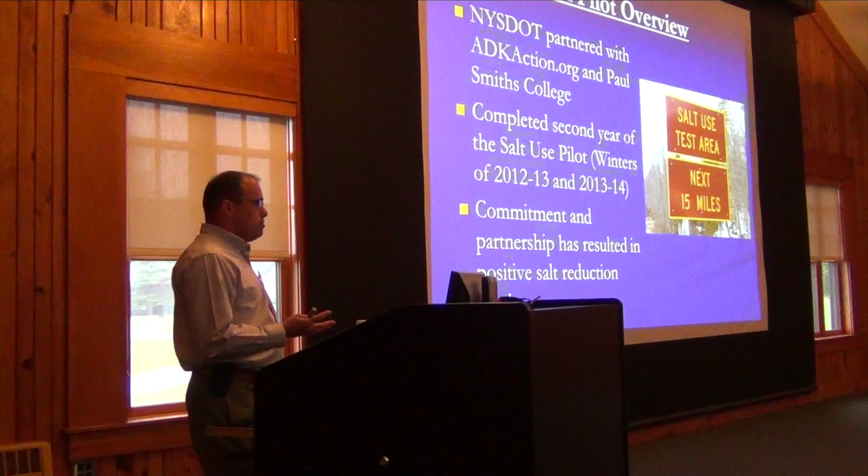The Department of Transportation partnered with ADKAction.org and Paul Smiths College to start this salt use pilot up here in the Adirondacks, to take a look at our practices and ways to help reduce the application of salt into the environment.

We just completed our second year - the winters of 2012-13 and 2013-14. This shows our commitment and partnership with the two groups, working with them and with our folks to try to have positive salt reduction results. This presentation will show some of those accomplishments over the past couple of winters.

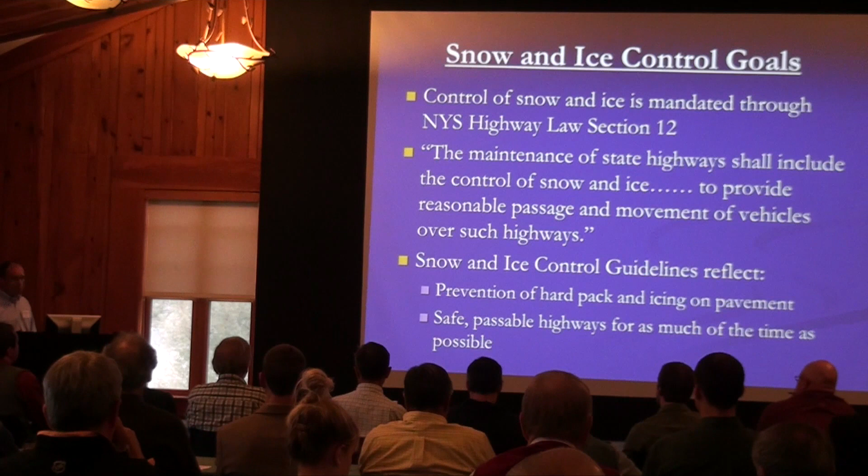Snow and ice control goals that the department has: we're mandated under New York State Highway law to provide maintenance of the state highways, including snow and ice control, and to provide reasonable passage and movement of vehicles over the highway system. Our snow and ice guidelines reflect that - we work to prevent the formation of hardpack and icing on pavement while also maintaining safe and passable highways for as much of the time as possible. There's going to be snow and ice accumulating on the highways, but as long as we're working to prevent that from bonding, we keep the highways relatively safe as best we can, while keeping the environment in mind.

In 2012, we modified our snow and ice guidelines, reducing our salt application rates. Statewide, for snow events, we reduced our initial application rates by 10% across the board. So that was one step we've taken.

We've also expanded the use of pre-storm anti-icing operations using liquids - expanding the use of salt brine in advance of a storm so that we can get the salt on the road, and then once the storm hits, we can come by with a follow-up application rate of salt instead of starting with our higher initial application rate. So that's another area where we've improved our operations.

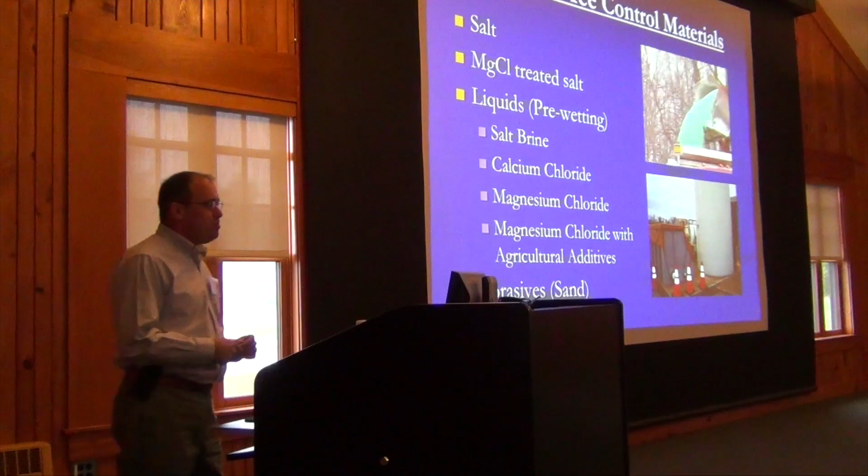Types of materials that we use: primarily we use salt. It's relatively inexpensive, although the prices did skyrocket this coming year with the OGS contract. We also use salt treated with magnesium chloride, which allows the salt to perform a lot better in colder temperatures, and we can use it at reduced application rates. Essex County, our DOT facility, has gone exclusively to treated salt now because of the added benefits we've seen in its performance.

For liquids, which we use for pre-wetting the salt before it hits the road, we use salt brine. Salt brine is also used for direct application on the pavements. For pre-wetting salt, calcium chloride is used, magnesium chloride is used, and magnesium chloride with agricultural additives is also utilized. That coats the salt, allowing it to work quicker and better at a lower application rate.

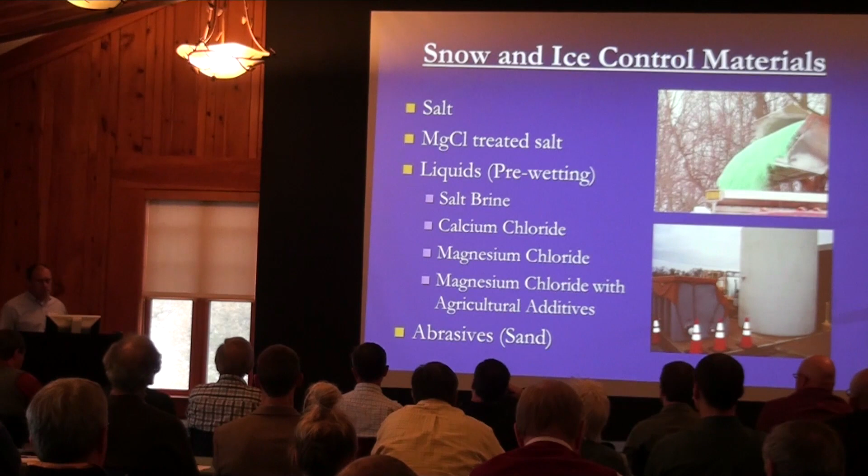Sand is not effective for higher traffic speeds. Heavier applications are needed, and the sand needs to be mixed with salt so that it doesn't freeze up rock hard in the storage facility. So we're still putting down higher application rates of sand with also a higher amount of salt within that sand. Unfortunately, sand does not melt ice, so it promotes hard pack conditions on the road, which require higher amounts of salt to burn that off.

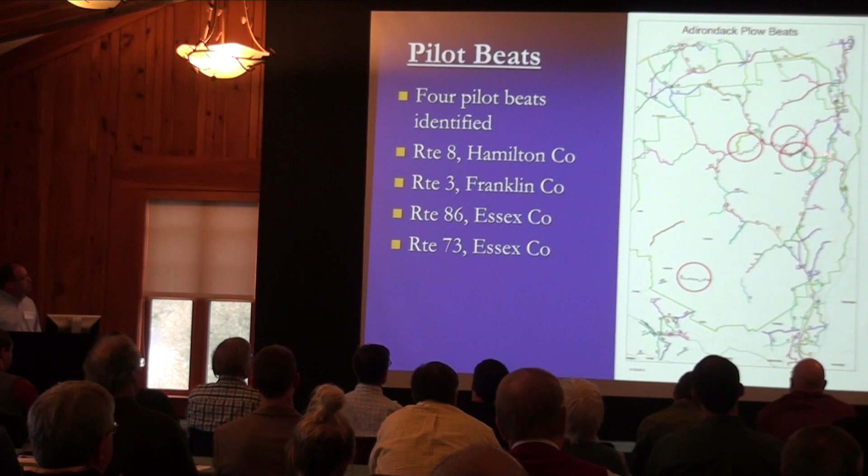This map shows all the plow beats all up in the Adirondack Park. All those different colors are individual snow plow beats. We identified 4 pilot beats for this study: one down Route 8 in Hamilton County, Route 3 in Franklin County, Route 86 coming out of Lake Placid, and Route 73 along the Cascade Lakes corridor.

So I mentioned earlier some of the challenges that we face in trying to maintain safe highways in the winter and also being good for the environment. But the demands and efforts of snow and ice control are different every winter.

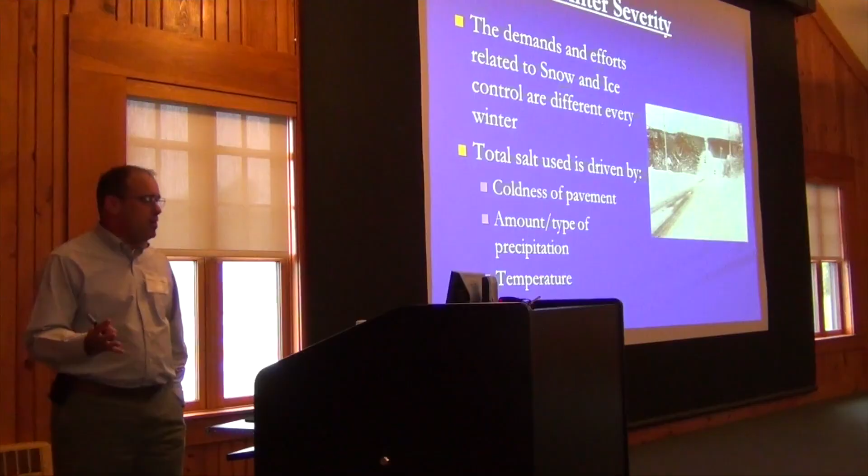You may remember the winter of 2011 - that was basically a half winter for us. There was hardly any snow, hardly any winter precipitation. Last winter we got clobbered - it was a very, very bad winter. We were out there quite often treating the highway pavements.

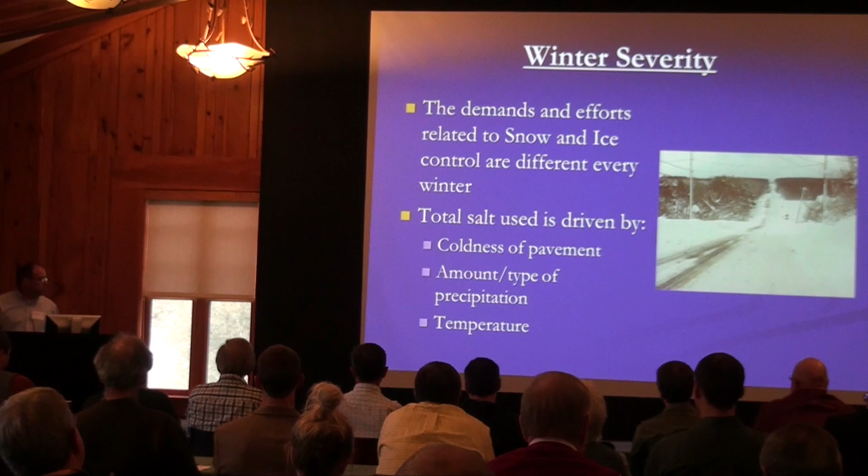So the total use of salt or any other snow and ice control materials are driven by the coldness of the pavement, the amount and type of precipitation - be it light fluffy snow, heavy wet snow, freezing rain, whatever the case may be - and the outdoor temperature.

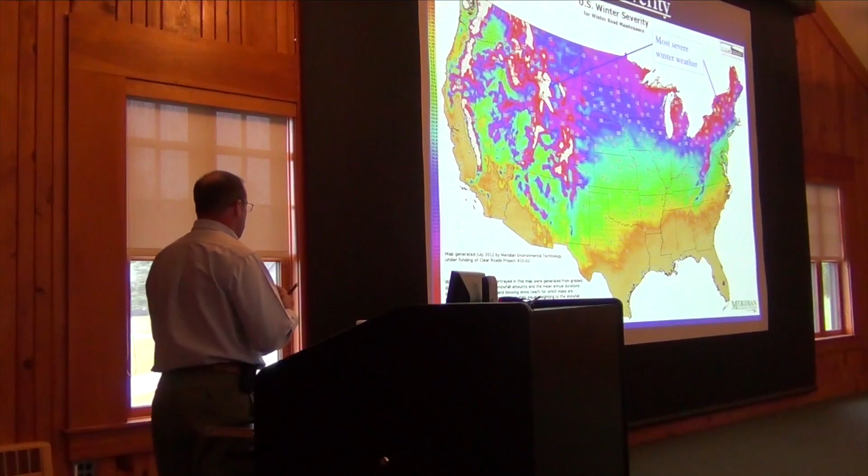The scale on the side here is like down south - you really don't get much. You can see we have no member states down here, so we can't go to warm places for these meetings. But down here at the bottom of the scale, where it's white and pink, those are the worst winter severity areas in the country. They take into account the amount of snow, the amount of freezing rain, temperature, blowing snow, all sorts of things. This is one map that compiles all that information.

So if you look at the most severe winter weather in the country, you can see out here in Colorado, you've got some white areas, up in the high peaks of the Rockies. Take a look right there - that's Saranac Lake. So Saranac Lake, Franklin County, up here in the Adirondacks, the reds and the whites and the pinks - New York State has some of the worst weather in terms of winter severity in the country.

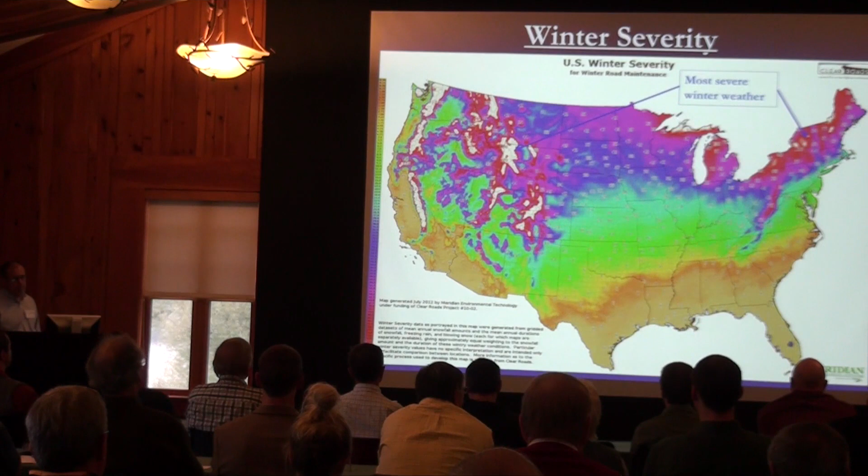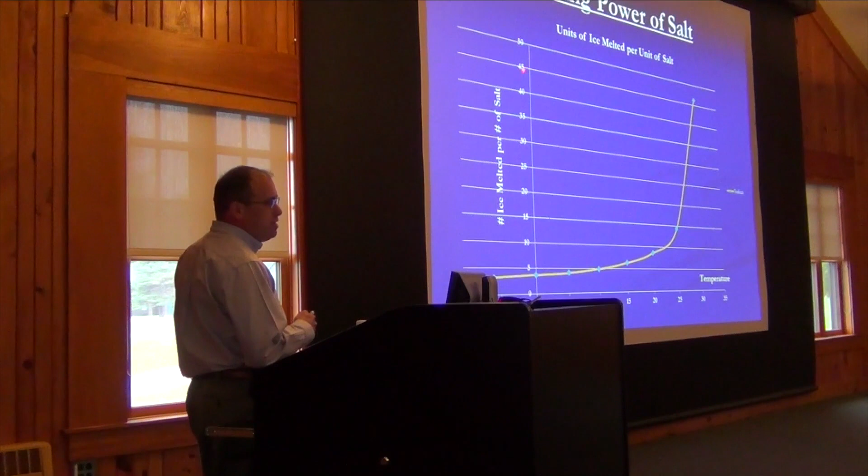Let's talk a little bit about the melting power of salt. Salt is not very effective in cold temperatures. If you look here at a temperature of roughly 30 degrees, this shows that 1 pound of salt will melt 45 pounds of ice. You drop 5 degrees down to 25 degrees, 1 pound of salt will only melt 12 pounds of ice. And it gets worse as it gets colder.

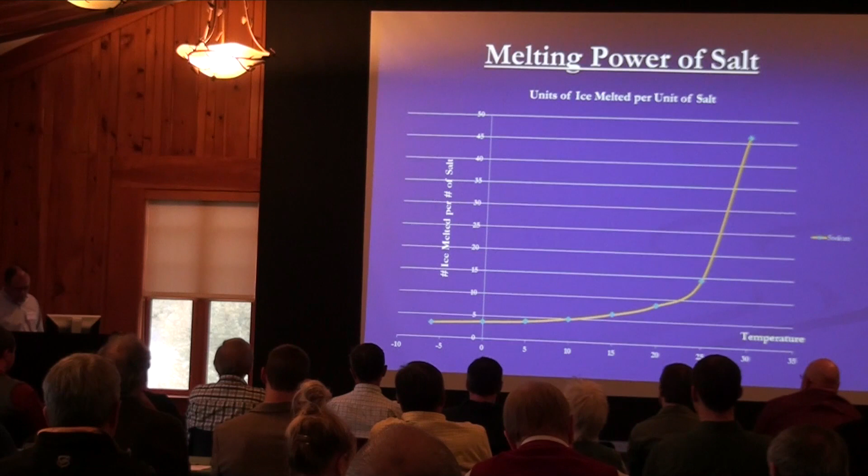So with the colder temperatures that we've been experiencing, although we're working hard to maintain lower application rates and control the salt use going out, with the lower temperatures and higher precipitation, more material is needed. So what we did is try to equalize a normal winter to what we experienced over the last several years.

We developed a relative severity equation here. From 2008 through the 2013-14 season, we developed an index factor which looked at the National Weather Service snowfall data, and we divided that by a temperature factor. The temperature factor is the amount of ice melted over the amount of salt needed to melt that ice at average winter temperatures.

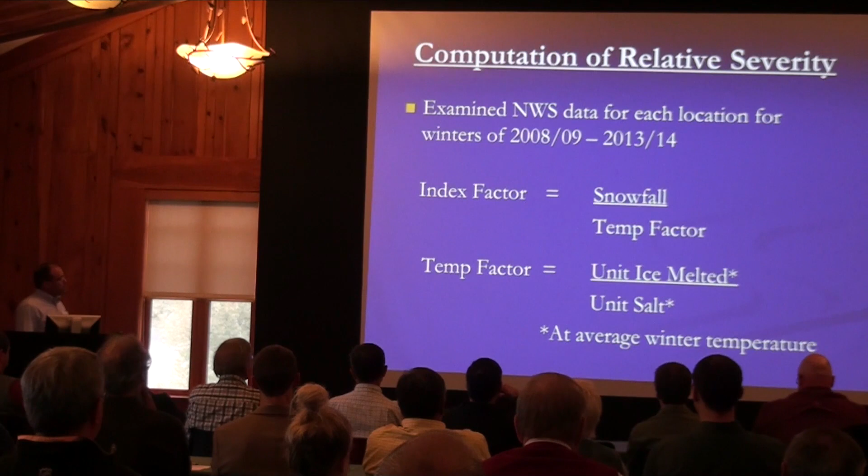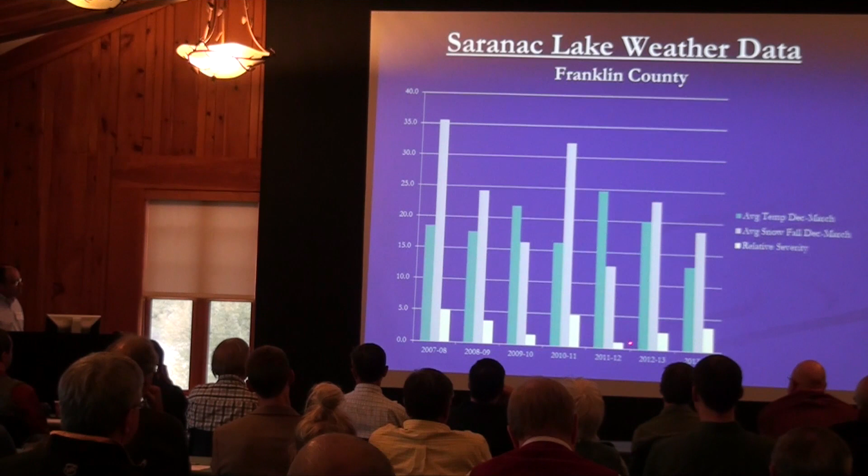So what we did is take that information. This is the Saranac Lake area, Franklin County. The average temperature is the blue, so here's 2011 to bring that up, but you can see the temperature was declining, getting colder. The average snowfall, you can see the amount here, and that is increasing, shown in a grayish, whitish color. The colors don't do too well on this screen, but basically using that equation with winter severity, you can see at least the last three seasons, when you equalize it out, the severity of the winters has been increasing, moving up.

So you can see over the last bunch of winters, the salt use has actually been coming down a bit. But these last couple winters, with that increased severity, the actual amount of salt that's gone out has increased a little bit over the last few years.

And this is for the entire shop in Franklin County, Paseco Lake, Lake Clear, right Rob? This is at Lake Clear, where all the beats for that area come out of, and this is the specific beat on Route 3, the amount of material that was used. So you can see the material has gone up a little bit over the last few years, but you have to keep in mind the severity of the winters we've been experiencing.

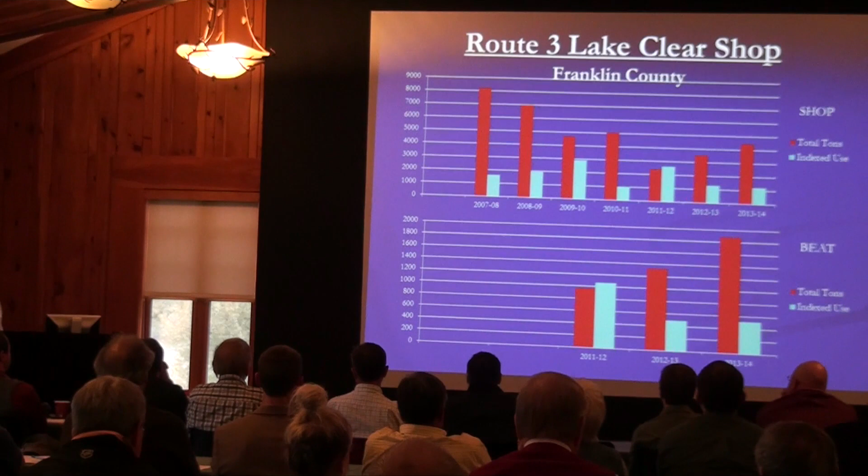So now if you look at the actual indexed use with the severity, you can see over the last few years, that's the light blue, and when you equalize it, it's actually been coming down. So the amount of salt we've been applying relative to the winter has been coming down over the last several years during the pilot. We think that's good. It shows how closely our supervisors are monitoring the salt applications out on the highway system, and with the challenges of the colder winter, we're trying the best we can to control salt use so we only put out as much as needed.

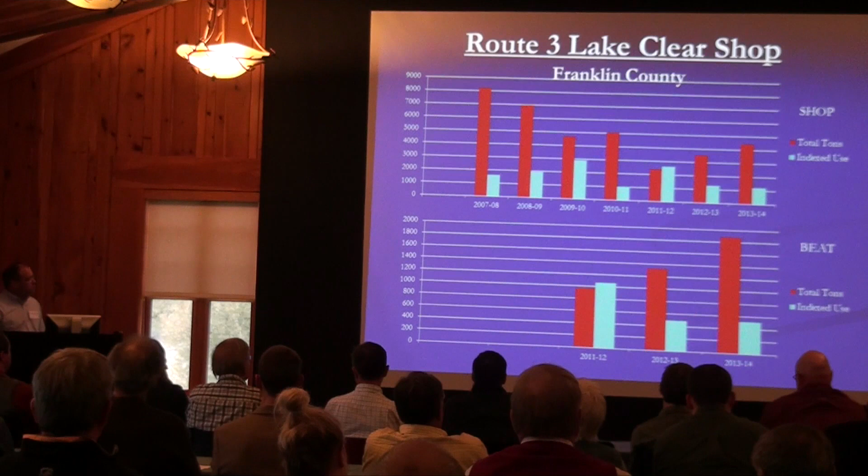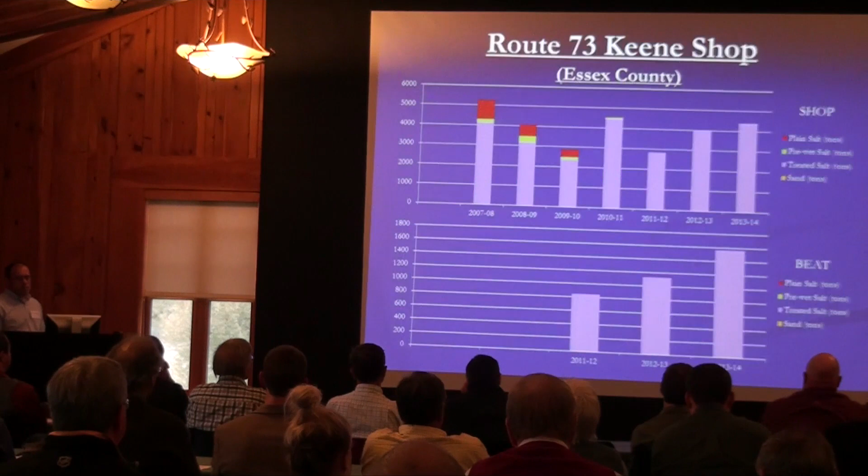So I'm just going to flip through these - this is Route 8, Piseco, and Lake Placid area, Route 86, and then Route 73 out of Keene. That's their data there, so like I said, you can look at that on the website.

So anyway, one of the successes here is the material application rates have ranged between 194 to 225 pounds per lane mile. That's for the temperatures we've been experiencing, well within and actually a little lower than what our application rates are in our snow and ice guidelines. For the lower temperatures, around the 20-degree area, our guidelines say 250 pounds per lane mile is what we should be using. But based on our data, we've come way below that, and we're still maintaining the road safely.

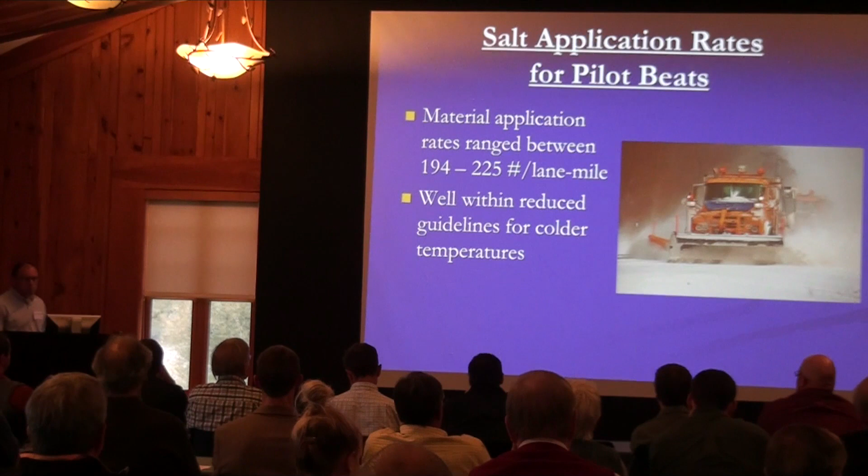Some of the tactics we're using for the Adirondack pilot, and actually statewide in many cases, is the use of underbelly scrapers on our plow trucks. Our plow trucks usually have a front plow and a right wing - if you're out on the interstate, you might see two wings on the plow. But we also have these underbelly scrapers, and what these do is, it's kind of like a double-edged razor when you're shaving: the first plow takes off the majority of the material, and this underbelly plow acts like that second blade coming through to get anything the first plow blade has missed.

In Franklin County, there are 20 plow trucks, and we have 5 of those trucks with an underbelly scraper. As we replace trucks and get new trucks into the fleet, we're getting more and more with underbelly scrapers on there.

We have a lot of good experience with the underbelly scrapers. When we lower those application rates as low as we can go, we're probably right at the limit where salt remains effective versus becoming very ineffective. We've noticed that with lower application rates, hard pack had started forming in some areas, and those underbelly scrapers take it right up. So instead of putting a bunch more salt on there to try to melt or burn it off, the underbelly scrapers are actually doing a good job hitting that hard pack right as it's starting to form, keeping it off the road.

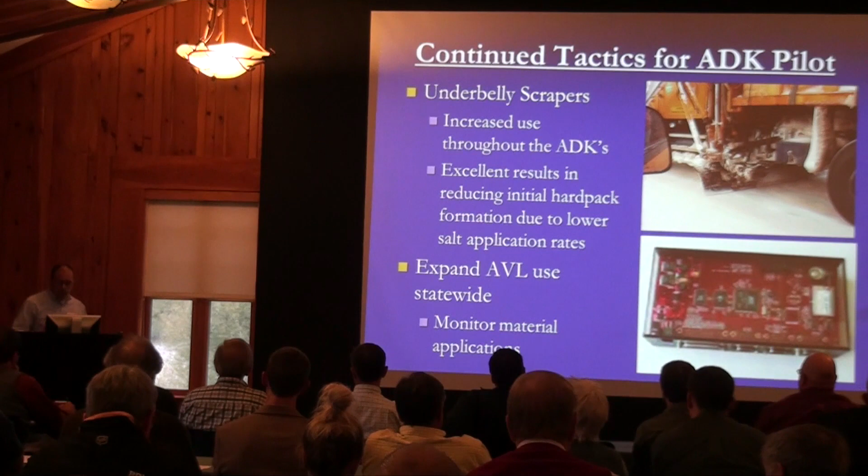What that can do is provide data as to how much material we're putting out, where the trucks are, how fast they're going—information that managers can use to follow up if someone's putting out a much higher application rate than they're told to do, or if there was a situation that required that higher rate. So that's another step to try to monitor our salt use as much as possible.

We're increasing the operation of pre-storm anti-icing, where we put liquids down on the pavement before the storm actually hits. We can't do that for every storm—if it's going to rain ahead of time, that's kind of a waste of putting material out, and if it's too cold, you might not be able to put the liquids down.

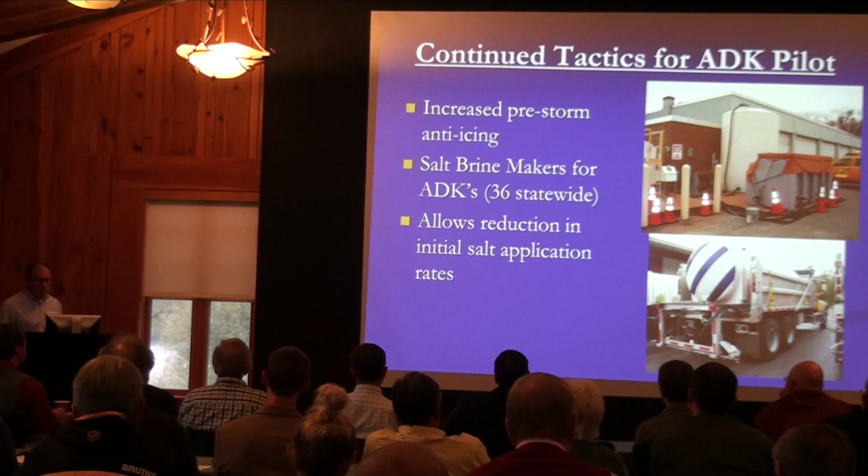One of the projects we worked on recently is purchasing a bunch of brine makers to be used across the state. We purchased, or are purchasing now and having installed, 36 brine makers across the state in addition to the few we already had. As I mentioned earlier, that allows an initial reduction in the application rate of salt when the plow trucks actually come out to attack the storm.

In the Adirondacks, specifically in our Region 1, we have a brine maker going into the Severance Shop and one at Ray Brook. In Region 7, we have one in Plattsburgh, Malone, and Massena. We can't put salt brine makers everywhere because you need a real good water source, and some of our locations are on wells that just don't have the recovery, so we try to use locations that have a municipal water system. If we have brine makers in these locations, we can also install storage tanks in our remote locations, produce the brine at one location and tank it over to have it available at a location that doesn't have a brine maker.

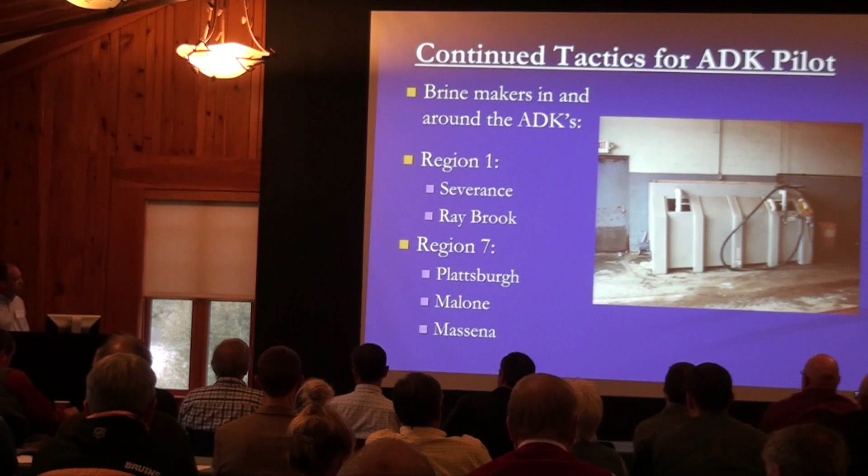Some of the things we tried but are discontinuing as a result of this pilot is the squeegee blade. The squeegee blade is a good idea, kind of like what I described with the underbelly blade. You've got the extra blade here, you've got the cutting edge on the front of the plow, and this heavy rubber blade.

That blade comes down and squeegees off behind that first blade. The problem we saw is it's not compatible with our trucks—when the blade goes back and forth, it hits the framework of our truck and damages this part of the blade. It also didn't perform as well as we thought it would in terms of squeegeeing off behind, so we discontinued that use. That was one thing we were going to try up here, but we tested it out in the middle part of the state first, and before we brought it up here, found it didn't really work all that well.

Another system that we tried is a maintenance decision support system. We tried that at several locations across New York State.

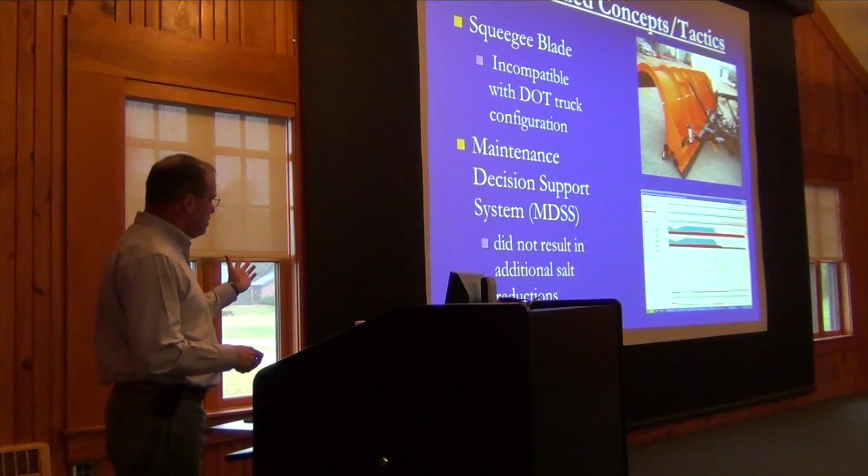As the storm was coming in, the system will tell us at a certain time the plow truck should go out with a certain amount of application of salt or whatever it is, and then two hours later do the same thing, or at a reduced rate, or whatever. So it'll give you recommendations on when to start, when to stop. Maybe you don't have to apply material, just plow. It's supposed to result in salt reduction.

In the pilot areas down in the western and southern part of the state where we tried this, we really didn't see much of a salt savings that the system recommended, because our application rates were already low enough that if it told us to cut it in half or even more, the salt wouldn't be effective. So that really didn't show us savings, because we're already managing our salt as well as we can. There's no sense in investing any more into that system.

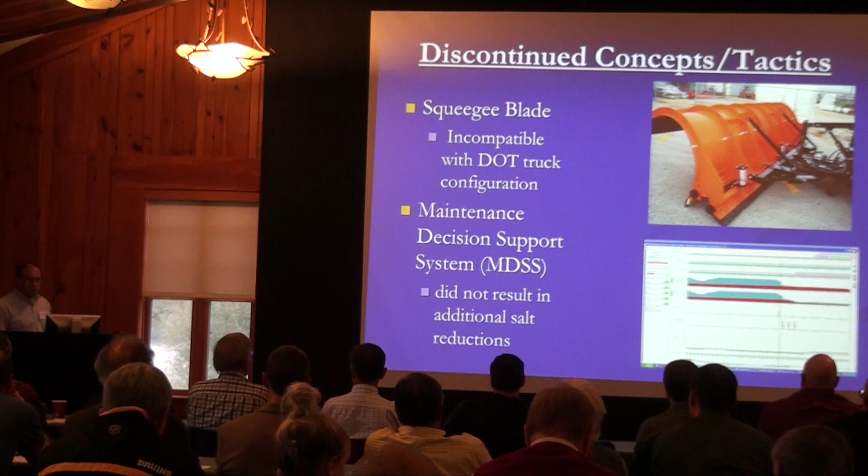One of the key things is point sources are a problem. We don't know how much that contributes, but if you have an open pile of salt just sitting out in the environment over the summertime, it's constantly getting rained on and washing into the environment. So if there are any uncovered salt piles out there in the towns or counties, or like at a shopping mall where there might be a pile of salt plopped down for their use, that kind of stuff needs to be covered. That's where some improvements can be made beyond DOT, but we have everything under cover.

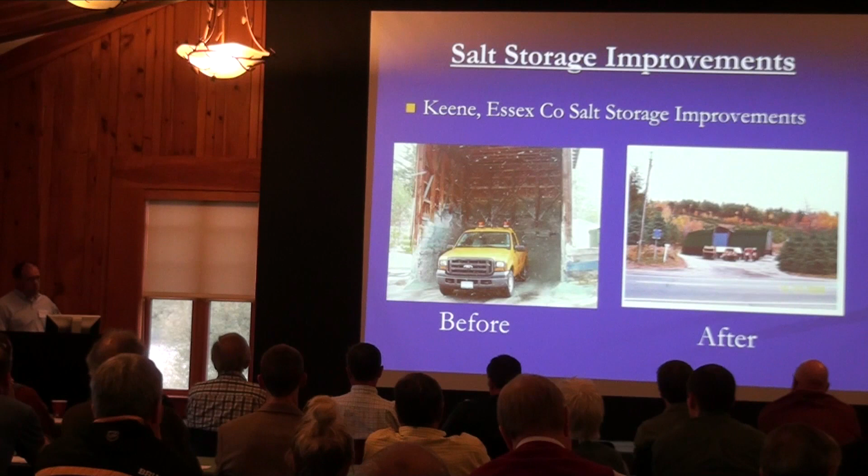So anyway, to wrap up our salt reduction tactics: one of the things we did here in the Adirondacks specifically is reduce the speeds of the plow trucks. Normally we go 30 to 35 miles an hour, but we reduced those speeds to 25 miles an hour.

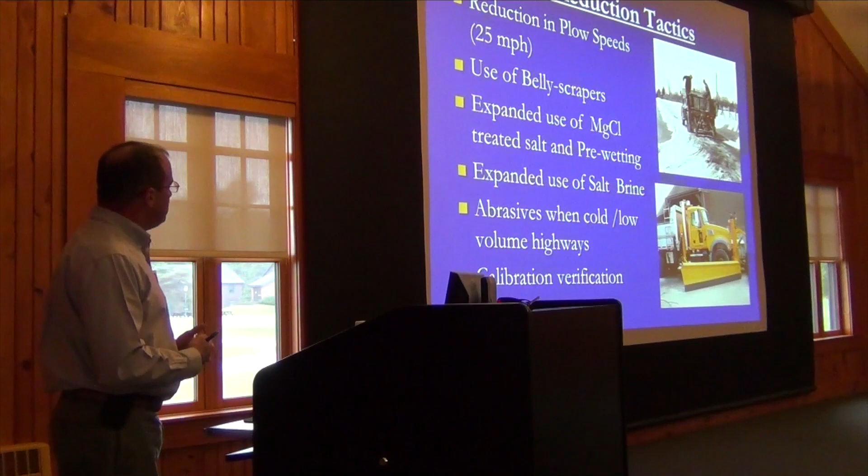The reason for that is as the salt comes out of the truck, it bounces and scatters. If we slow down the trucks, the salt comes out and it reduces the bounce and scatter, and the majority of the salt stays on the road where it belongs, so it can be effective and anti-ice the pavement instead of bouncing onto the shoulders and getting into the environment without being used.

Again, the use of the belly scrapers.

Expand the use of magnesium chloride treated salt. As I mentioned, Essex County is exclusively using the mag chloride treated salt, and also pre-wetting salt directly off our trucks. You can see here this is what we call a saddle tank. It goes along the side of the truck, and in the saddle tank is where we carry the magnesium chloride liquid. Then out of the back of the truck, when the salt comes off the spinner, it gets sprayed at that point.

We'll continue to use abrasives sparingly. When the salt is ineffective, we may use salt or sand on a steep hill or intersection to try to keep a little bit of friction there so the cars can stop.

Calibration verification every year: our spreader controllers for the trucks have to be calibrated. We make sure they're calibrated, so when the spreader says we're putting out 115 pounds a lane mile, we're actually putting out 115 pounds per lane mile. We'll calibrate them during the season to make sure the trucks are still accurate.

And we'll do some focused snow and ice training. We do that statewide anyway, but up here in the Adirondacks we're working a lot more with the supervisors and operators to stress the importance of environmental sensitivity, making sure they're putting out just the right amount of snow and ice materials that are needed.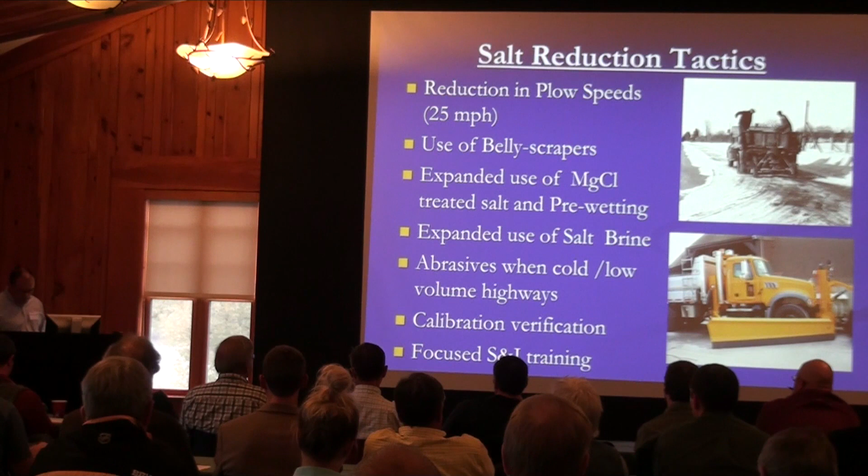We continue to track the trends of our salt use, like I showed earlier with those charts. Again, we monitor levels of service of the highway to make sure vehicles can get through safely and reasonably.

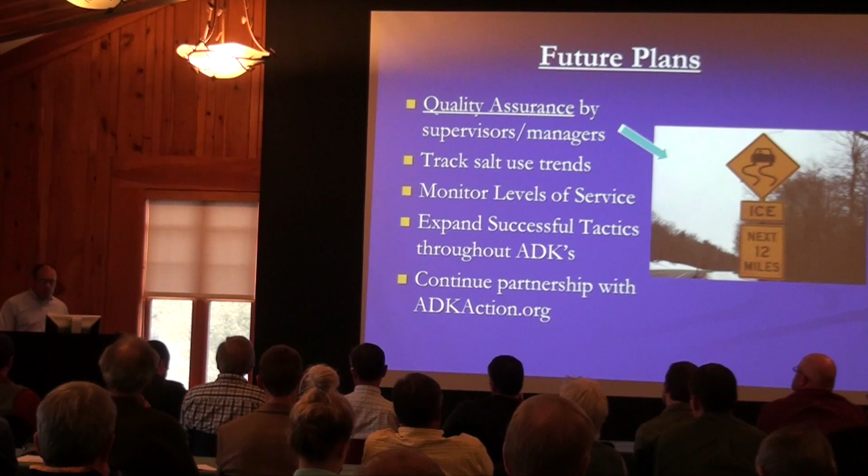The tactics that have been successful, we're going to continue to expand them, not just on the pilot beats, but throughout the Adirondacks and as much as we can across the state. And of course, we'll continue working with adkaction.org, trying to keep the lines of communication open, and work with them on our tactics and other efforts we're making to be good with the environment when it comes to salt use.

New York State DOT is involved with a number of national level partnerships. The main one we're with, as I mentioned, is Clear Roads, a research pooled fund for winter highway maintenance. We're also a member of the AASHTO Winter Maintenance Technical Service Program and the New York New England Maintenance Consortium.

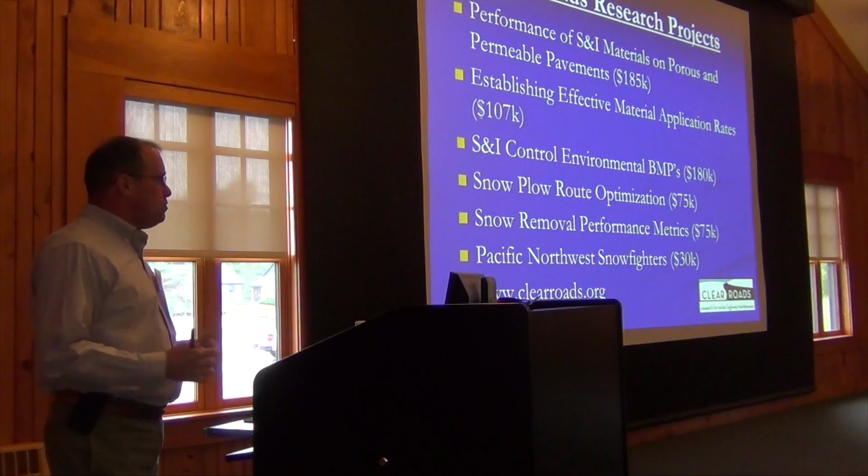Establishing effective material application rates - there was $107,000 worth of research that we're getting for $25,000. Snow and ice control, environmental best management practices - you can see all the dollar amounts of the research. Snow plow route optimization is another one we're going to be actively involved in - what's the best way to align our beats for our plow trucks to get them out so we're using the least amount of fuel, least amount of material.

Also, the Pacific Northwest Snowfighters - Clear Roads has kind of taken over that group. What this group does is look at all the different types of snow and ice chemicals that are out there, do lab tests, and then approve certain materials. You've heard of beet juice, and there's all sorts of names of different materials out there that are being used - some are good and some aren't. So the Pacific Northwest Snowfighters looks at them and says, no, this stuff's no good, or this stuff meets our strict criteria, and these are approved.

New York State uses some of these, but we have even stricter chemical constituent requirements than the Pacific Northwest Snowfighters do in some cases. So some products approved by Northwest Snowfighters may not be approved here in New York because there might be some constituents that are a little too high.

www.clearroads.org is the website if you want to take a look and see what other kind of work we're doing. That's an outstanding group, and I mentioned Dave Weeder is the chairman of that now, and we just have, what, remainder this year, Dave? 27 Mondays, my friend. Okay, very good.